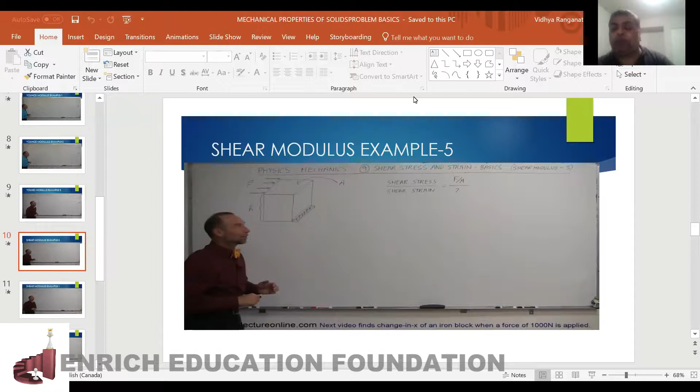Here we're going to talk about shear stress and strain in our next video. We're just going to talk about the basics and explain what that really is. Again, when we talk about stress and strain, the ratio of stress divided by strain in this case is going to be equal to what we call the shear modulus. Let's write that down. Shear modulus is the measurement of the property of a material related to the shear stress and the shear strain. We don't know yet what it is, but hang with me.

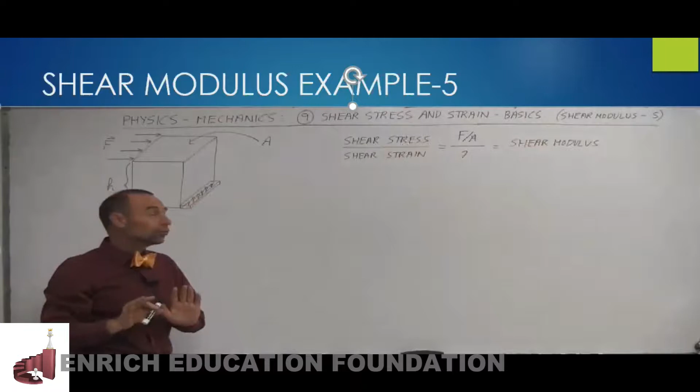Again, shear stress is force divided by area, so that hasn't changed. What do we call the shear strain? Well, to illustrate that, I have a little drawing right here. Let's say we have a big block of some sort of material, and let's say that we anchor one part of it down on the ground like here. We nail like a 2x4 down here so that this can't move.

Now we go ahead and push on the material in this direction. What will happen is this material will deform. And how it will deform is that this top portion of it will be pushed to the right, and because the bottom portion here cannot move, it'll stay in place. What we find is that this will deform like this, and the material will, in a way, bend kind of like this.

I'm hoping that becomes clear. My drawing skills aren't the greatest, but you can see that the top portion of the material has moved over a distance like this, and let's call this distance delta x. A certain amount of deformation of the top portion of material where the bottom portion of material is not deformed at all. And of course, it does depend upon the height, h, here. If this height is very small, then delta x will probably be very small as well. If h is very large, then delta x could be proportionally much larger as well. And of course, the amount that the material deforms like that will depend upon what we call the shear modulus, which is the strength of the material in this particular fashion.

So the shear strain can be defined as the amount of deformation in this direction as a function of the height of the material. So this will be delta x divided by h.

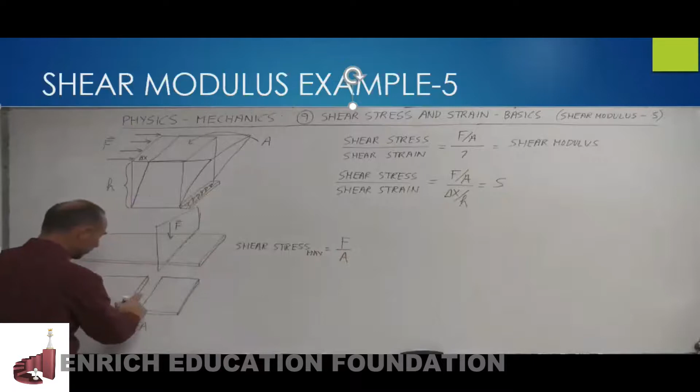In this case, the area will be the cross-sectional cut of the material, and the force is the force applied to do that. So once you know the shear stress of the material, you multiply times the cross-section area, and then you can calculate how much force you need to do that.

Another application in industry where this is important is where you try to punch out a hole out of a material like this. Let's say you have a metal sheet, and you want to punch a hole in it. So you come with a big punch, and you come down, you apply a certain amount of force, and the question is, how much force does that require in order to punch out that material?

Well, when you see the piece that was punched out, you're left with a hole. So let's draw this again over here, and then you're left with a hole, and the hole probably kind of looks like this.

Not quite, let me try again. There we go, that's a little better. So that's what the hole would look like.

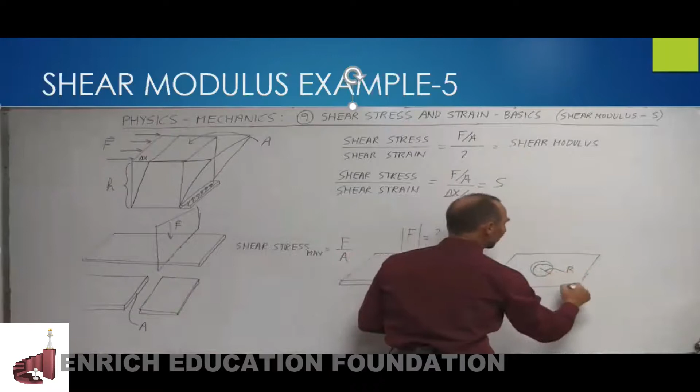Notice that you have a radius of the hole, and a circumference of the hole, where the circumference is equal to 2 pi times the radius. And then you have the height, or thickness, of that material.

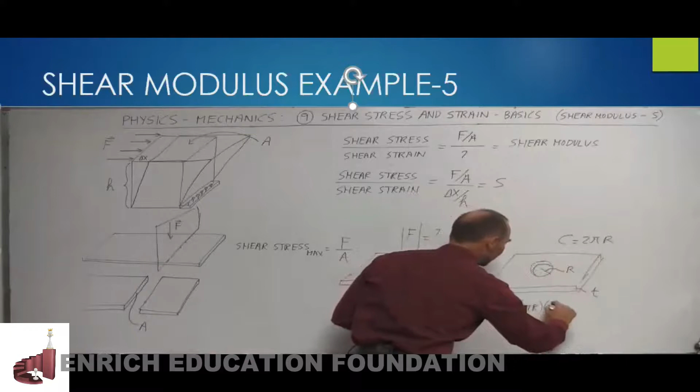The cross-sectional area we're interested in is simply the area left by the side of the hole. If this is the thickness of the material, call it T, then the area would be the circumference of the hole, 2 pi r, multiplied times the thickness T, which gives you the cross-sectional area of the cut, similar to the cross-sectional area of the cut here.

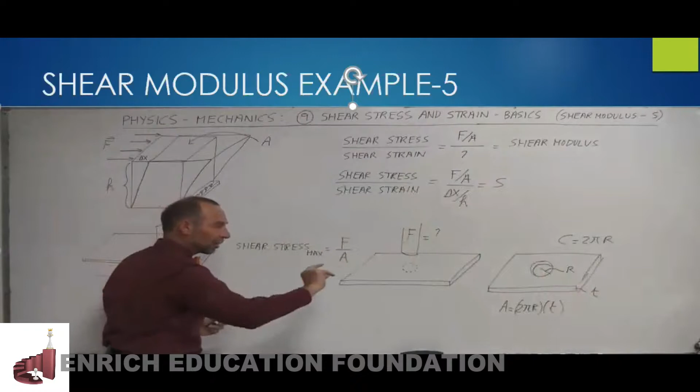When you talk about the shear stress of a material, it's the force required to punch a hole through it, where the leftover area along the sides of that hole equals A, which is the circumference, 2 pi r, times the thickness of the material. That's a good application of the shear modulus. In the next couple of videos, I'll do some examples of calculating the shear stress and force required to cut holes through material.

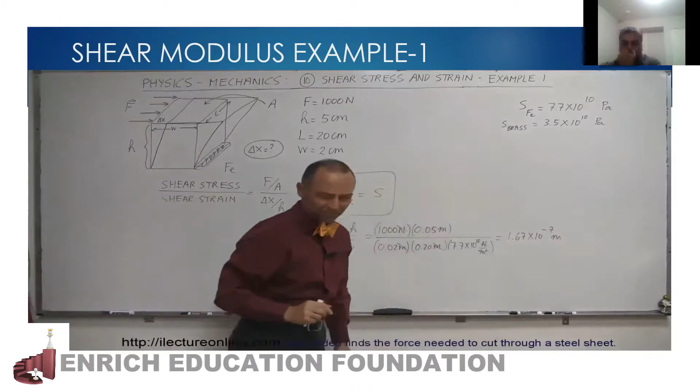That's very small. I'm going to do this again just to make sure. Equals, sure enough, that's a really tiny amount, less than a micrometer. I would say that block, the deformation, even though it's really there, I don't think you can measure it or even see it. So you get this block of metal, push on the top, you get a very small amount of deformation. Regardless of the results, I think the illustration is pretty clear.

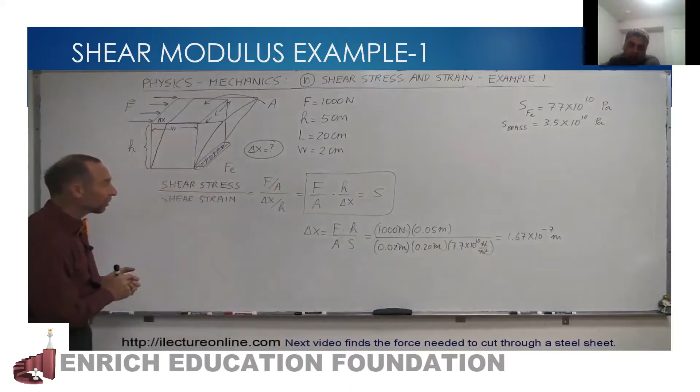Again, we have shear stress divided by shear strain, which is F over area. Now in this case, it's not the cross-sectional area of a cable, but simply the top of the material that gets deformed in that direction. Height is the thickness of the material this way. The force applied is the force applied at the very edge of the top there, and of course the shear modulus is the modulus related to the material — that's how you find the deformation of a material. So that's a pretty good straightforward example to understand shear stress and strain a little bit better.

And then I have a few more examples where we're simply going to cut a piece of material off, and again the result is that we have to understand the shear stress in that case. That will be on the next video.

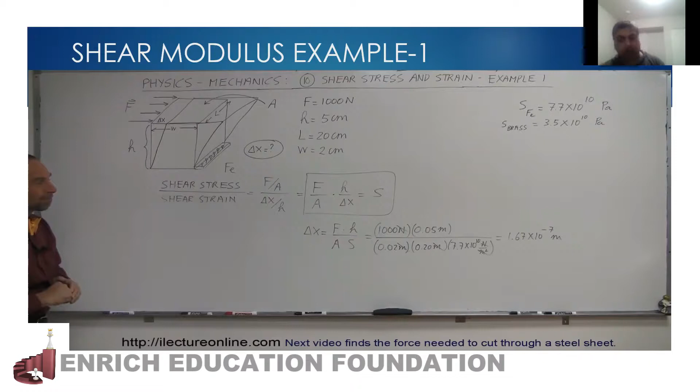Here we're doing another example on shear stress and shear strain. In this example, we're going to show you the difference between the shear modulus and the shear stress.

Remember, the shear modulus, S — we use the letter S to indicate that — is an indication of how much the material resists deformation when it gets pushed in this particular manner. So when you push it on one edge and it's held on the other side, the whole thing will deform a certain amount, delta X, relative to the height of the material and the size of the material, the cross-sectional area of that piece.

And so the shear modulus, S, is defined as the shear stress divided by the shear strain. The equation for that is equal to the force divided by area, which of course is the definition of stress, force divided by area, same units as pressure, divided by the shear strain, which in this case is the deformation divided by the height of the material, h.

A practical application of this concept is shear stress. For example, let's say we have a machine that feeds a big roll of sheet metal, steel. The width of the material is 2.4 meters, about 8 feet, and the thickness is 2 millimeters. A big machine comes in and lops off sections as this roll gets fed in. How much force is required to shear off a piece of metal like that? For that we need to know the shear stress.

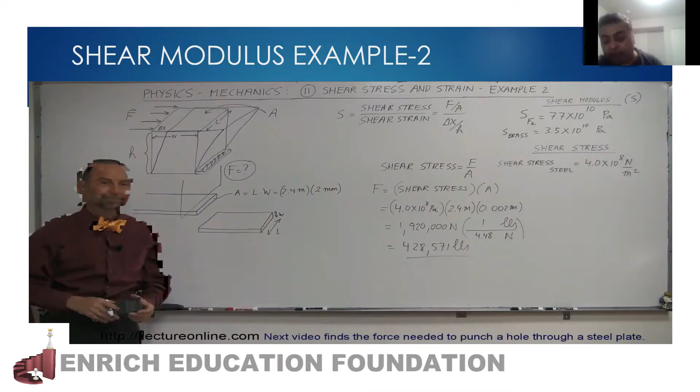Notice the shear modulus simply says there's a ratio between the force applied to material and the deformation when you push it to the side. I actually have a nice little textbook here, a physics book, tends to be very big in size, but notice this is a solid material. Of course, with the pages, it doesn't make it so solid, but if we push on it with force like this, notice how the book gets deformed. Materials deform like that, and that's what we talk about with the shear modulus — the amount of deformation in this direction x as a result of the height of the material and the cross-sectional area of the material.

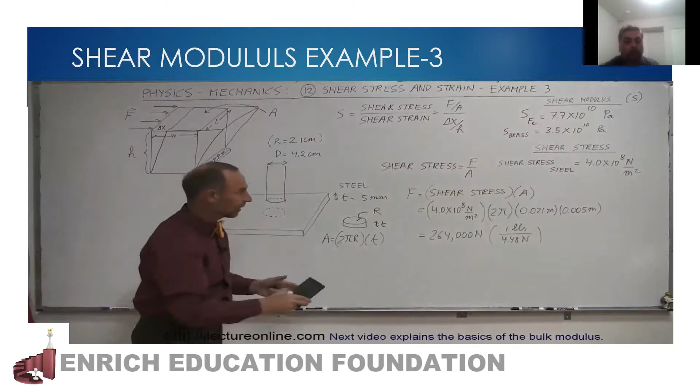Okay, convert that to pounds, remember, because pounds means more to some people than others, so 1 pound is equivalent to about 4.48 newtons, roughly speaking. And so if we divide that by 4.48, we get 58,900 pounds. That's quite a bit of force.

So if you build a punch press like that, you want to punch holes through sheets of metal that are 5 millimeters thick, half a centimeter, that requires quite a bit of force. But that's how we calculate that, and that's how it's related to the shear stress and the shear modulus.

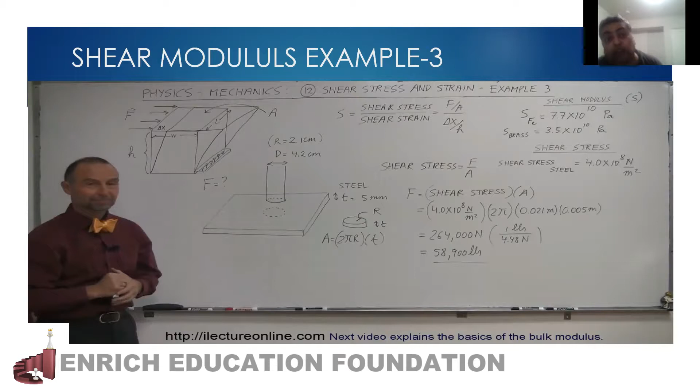In our next video, talking about the properties of materials, we're going to talk about what we call the bulk modulus. So we'll talk about just the basics of that.

The definition of the bulk modulus, we use the letter B to indicate bulk modulus, is the ratio of the bulk stress divided by the bulk strain. And remember, stress is always defined as force divided by area, which is kind of the same as the pressure, how much pressure you apply to a material.

Now, in the case of the bulk modulus, it makes a lot of sense to talk about pressure, because here we're taking a material like this. Let's say the dotted lines were the original volume of the material. You apply a certain amount of force on the material, and that force is divided over the surface area of the material, in other words a certain amount of pressure to the material, and you will cause the material to shrink in volume.

It changes in size as far as the volume is concerned, and we call that the strain. So the definition of the bulk strain is a change in volume divided by the original volume. This can then be defined as force divided by area, divided by the change in volume over the original volume. But we place a negative sign on that because whenever we apply pressure to a material, the volume actually shrinks, so the change is negative. It becomes smaller, so we put the negative there to make it a little easier to understand.

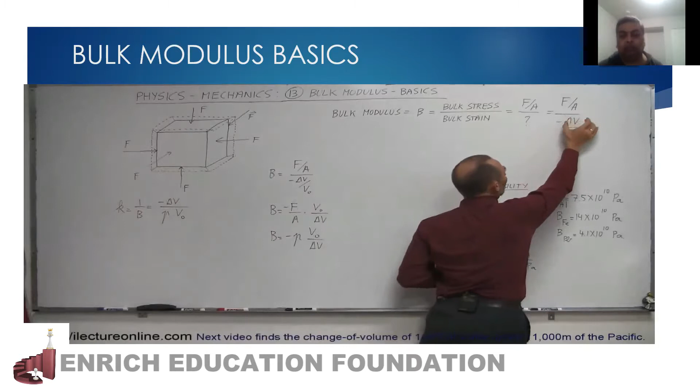In other words, if we apply a certain amount of pressure to the material, we expect a certain amount of volume change as a function of its original volume. We can see that the numbers indicate that the bigger the number for the bulk modulus, the more difficult it is to compress the material.

Then we have a term called compressibility, which is the inverse of the bulk modulus, which gives us a number that if it's bigger, it means it's more compressible. If it's smaller, it's less compressible. Again, it gives us a feel for how much force is required, how much pressure required to achieve a certain amount of volume change. And when we show you some examples, this will come a lot clearer to you.

But at least I want you to have a basic understanding of the bulk modulus and of the compressibility constant, and now we'll show you some examples how to actually calculate how much the volume changes when you apply a certain amount of pressure to a material.

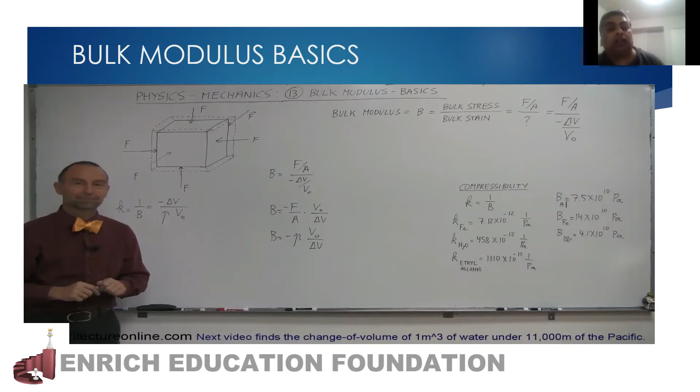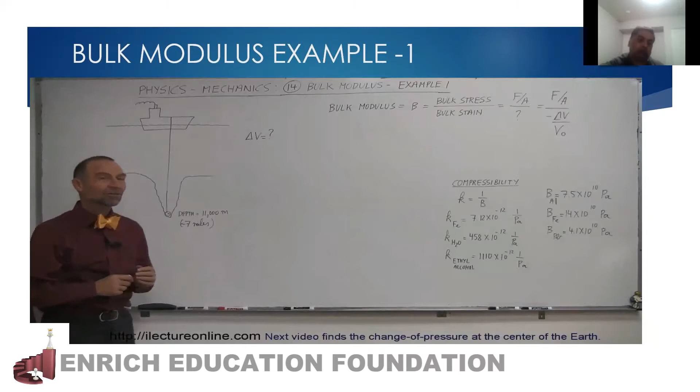Again, the bulk modulus by definition we use the letter B is the ratio of the bulk stress divided by the bulk strain. The stress, strain, not stain. And so the stress, of course, is the ratio of the force per unit area, which is another way of saying pressure. And the bulk strain is the ratio of the change in the volume divided by the original volume. Of course, it's negative because the volume gets smaller. So negative change in the volume.

So how much will, let's say, in this example, let me explain what I've just drawn on the board here. Here's the ocean. Let's say it's the Pacific Ocean. We have a ship at the surface, and we're doing an experiment. We're lowering this deep sea submersible, is what it's called, all the way down to the deepest part of the ocean, which is found off the coast of the Philippines, called the Mariana Trench.

And at the very bottom of the trench, you're 11,000 meters below the surface of the water, which is about 7 miles down. So you need a very long cable in order to lower a submersible in there. And yes, they've done that. They've actually sent people down there to take a look around. Not a lot to see, of course, at that depth, pretty dark. But it was something that they had to do.

Now the question is, what will be the change in the volume of, let's say, a cubic meter of water at the surface? If you take a cubic meter of water and you bring it all the way to the bottom, how much will the volume of that cubic meter change?

All right, for that we need, of course, a delta V, and we need the compressibility of water, which we can then turn into the bulk modulus by simply taking the inverse of that. So let's do that. Let's take the inverse of that.

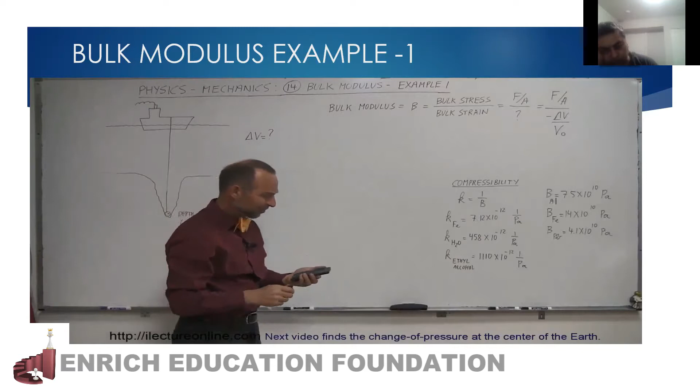So the bulk modulus for water, for H2O, is equal to 2.18 times 10 to the 9th pascals.

I simply took the compressibility, since of course compressibility is the inverse of the bulk modulus, that means the bulk modulus is the inverse of the compressibility.

Now that we have that, and we have an equation for the bulk modulus, let's solve that for delta V. B is equal to the force per unit area divided by the negative change in volume over the original volume.

Which can be written as B equals force divided by area, times the inverse of the denominator, which is V sub naught over delta V, with a negative there. Solving for delta V, we get minus delta V equals force per unit area times the original volume divided by the bulk modulus.

Since we're talking about going down into a liquid, we can talk about the pressure instead of force per unit area. The change in volume equals the pressure at that depth times the original volume divided by the bulk modulus.

For the original volume, we're just going to take a cubic meter of water. What is the pressure at this great depth in the oceans? It turns out that the pressure in a liquid is equal to rho g h, h being the depth in the liquid. Even though we sometimes use H or Y, in liquids we go negative for a positive depth, so the deeper we go, the bigger H is, the greater the pressure.

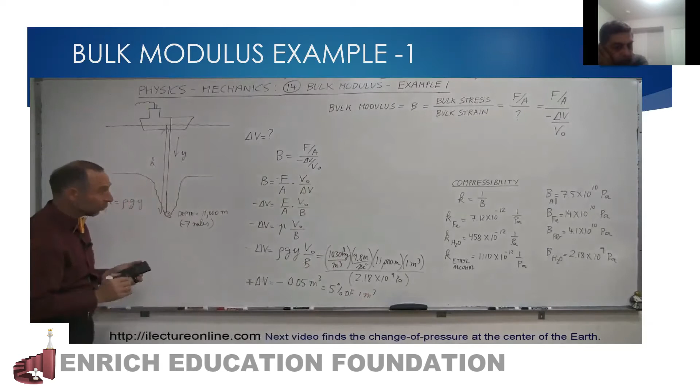If the original volume was 1 meter cubed and the change in volume was 0.05 meters cubed, that's 5% of 1 cubic meter. In other words, the water has been compressed by 5% of its original volume by the time we get to the bottom of the Mariana Trench. So 1 cubic meter at the surface, pushed down to the bottom, is now only 0.95 cubic meters, 95% of the original volume.

And that's how we use the bulk modulus to calculate things like that. We'll show you another example or two to get a better feel for it, but here's a very nice one.

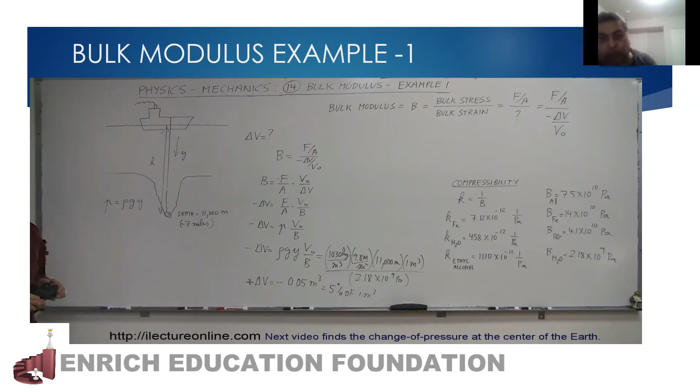Since this picture doesn't quite look like the Earth, let me draw it. Here's the Earth, and at the very center we have the central core, which is mostly made up of iron and it's solid.

We've determined, based on the Earth's average density, that the density of the core must be about 12 grams per cubic centimeter, considerably more than normal, because the density of iron at the surface is about 8 grams per cubic centimeter. So there's been a 50% increase in the density of the core due to the enormous amount of pressure.

So the question is, what do you think the pressure is at the very center of the core? First, since the bulk modulus is defined in terms of pressure and the change in volume, we need to figure out how the volume changed given that density change. The definition of density is mass divided by volume.

So the original density at the surface equals mass divided by the volume at the surface, and the final density at the core equals mass divided by the final volume at the core. If we talk about the same clump of iron taken from the top and compressed at the center, the mass doesn't change.

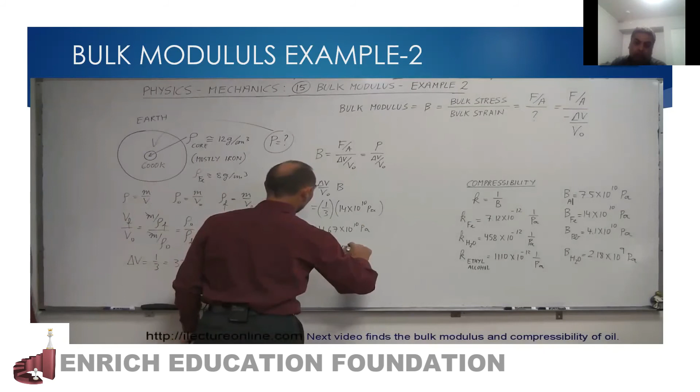460,000 times the atmospheric pressure - that's the pressure at the core of the earth. That's quite a bit, and it's enough pressure to shrink down the volume of the core of the earth to about 2/3 of the original size it would be if there was no pressure, or about a 1/3 reduction in volume due to the enormous pressure at the center of the earth. That's an interesting result, and that's how you calculate it using the bulk modulus.

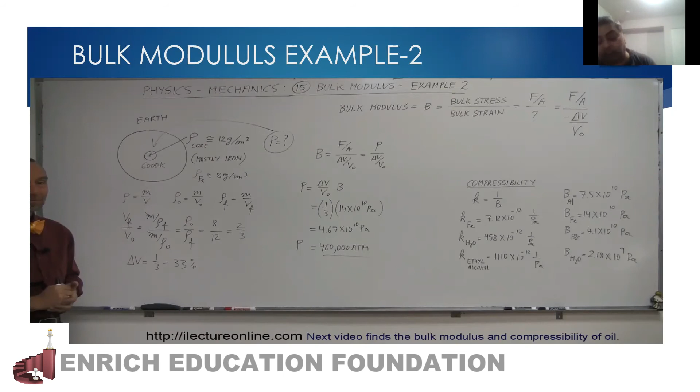Here, our next example, we're going to do something a little bit different. We're going to set up an example where we calculate the bulk modulus through an experiment. Let's say we have a container with oil in it. We have a piston, and we apply force, increasing it until we have an increase in pressure equal to 5 times 10 to the 6 pascals, about 50 atmospheres roughly speaking. We start with an original volume of 1,000 cubic centimeters. By applying this pressure, we reduce the volume by 1.5 cubic centimeters. From that, we should be able to figure out the bulk modulus and the compressibility of this particular oil, and that's typically how we do that.

Let's use our equation: the bulk modulus equals the force per unit area divided by the change in volume over the original volume. Force divided by area is pressure, so it's pressure divided by the change in volume over the original volume. The pressure applied was 5 times 10 to the 6th pascals, and the change in volume over original volume is 1.5 cubic centimeters divided by 1,000 cubic centimeters. Using a calculator, that gives us 5 times 10 to the 6th times 1,000 divided by 1.5, giving a bulk modulus of 3.33 times 10 to the 9th. This is unitless because cubic centimeters cancel out, leaving us with pascals.

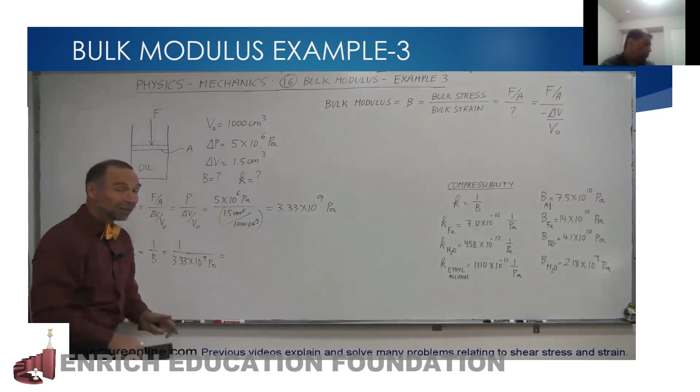So how does this compare? For water, we had 2.18 times 10 to the 9th. Here we have 3.33 times 10 to the 9th, a little bit higher than water, meaning this oil is less compressible than water because it has a higher bulk modulus - more pressure required for the same volume change. The compressibility K equals 1 over the bulk modulus, so that's 1 over 3.33 times 10 to the 9th pascals. Taking the inverse, we get 3 times 10 to the minus 10, or 1 over pascals. The bigger that number, the easier it is to compress the material. So this slips right in - a little less compressible than water, far less compressible than ethyl alcohol, but much more compressible than iron. That's a simple example showing how to calculate the bulk modulus or compressibility of a material. Thank you.